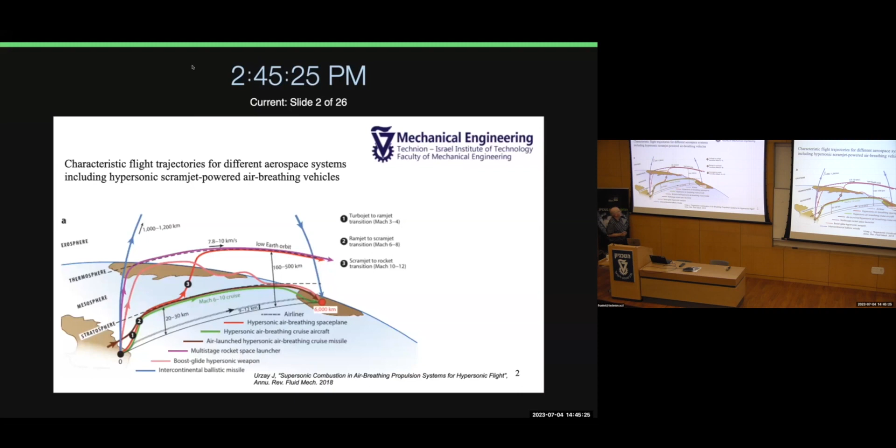Basically, if you want to transport some payload from one continent to the other, you've got several options. One of them is airliners, which fly over 9 to 12 kilometer height at about Mach number of 1. The opposite is ballistic missiles that go to space. And there is also the option to use air breathing propulsion for fast flight, at a height of 20 to 30 kilometers.

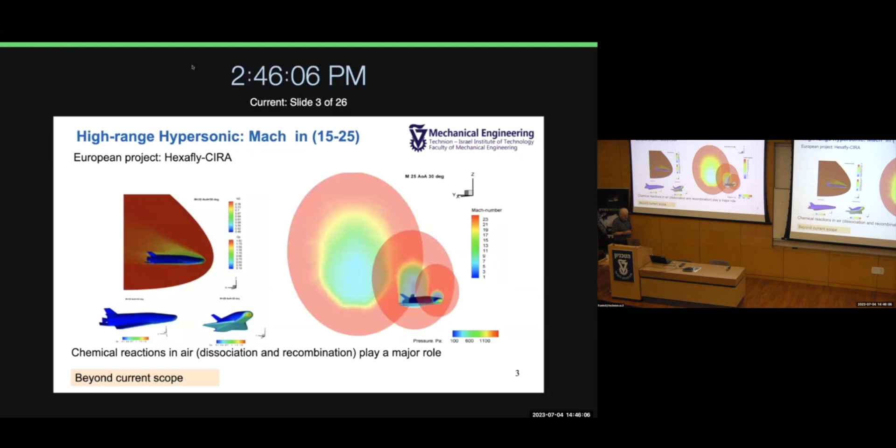Now, when you are talking about hypersonic flight, there is the extreme of very high Mach number, between 15 to 25. There is the European project Hexafly-CIRA aiming at that direction. In that case, chemical reaction in air plays major roles. I'm talking about dissociation and recombination, but this is not the current scope. I'm looking at more moderate conditions, the mid-range hypersonic flight, Mach number between 5 and 15.

There are already several demonstration flights in this field, like the very famous X-43A, which flew in 2004 for 20 seconds, and was the best source for a long time for data for evaluation of design tools. There is also the very famous case of X-51, which flew about 10 years later. It was propelled by hydrocarbon fuel, unlike the hydrogen of the first one. It flew for quite a long time and provided a lot of data.

And there are a lot of vehicles now under consideration. Some of them were mentioned in the morning, like the Lockheed Martin SR-72. This is an artist's impression, so don't base anything on that. Boeing is also presenting a mock-up of a civilian transport in all the last AIAA meetings I've attended, and probably eventually it will fly.

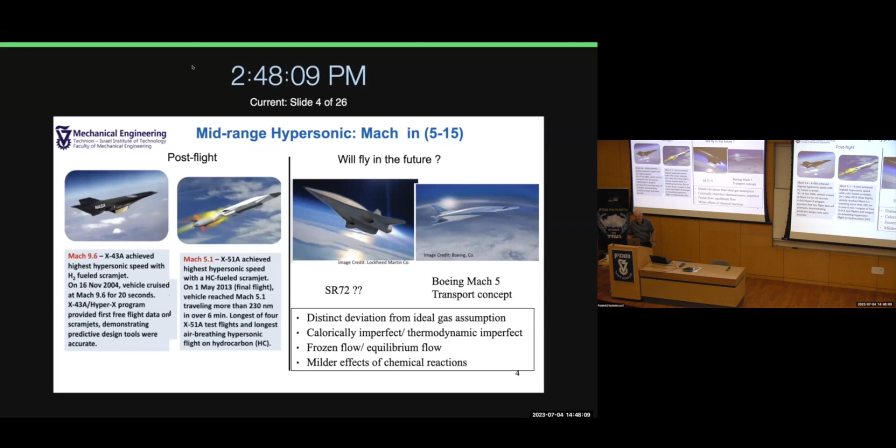When you consider selecting which propulsion system to use, you usually look at the ISP, specific impulse. You can see clearly that rockets give very low ISP but constant across all Mach numbers. For low Mach numbers, turbojets and turbofans give the best performance, using both hydrogen and hydrocarbon fuels. But as Mach number grows, their attractiveness is reduced, and ramjets and scramjets become more favorable.

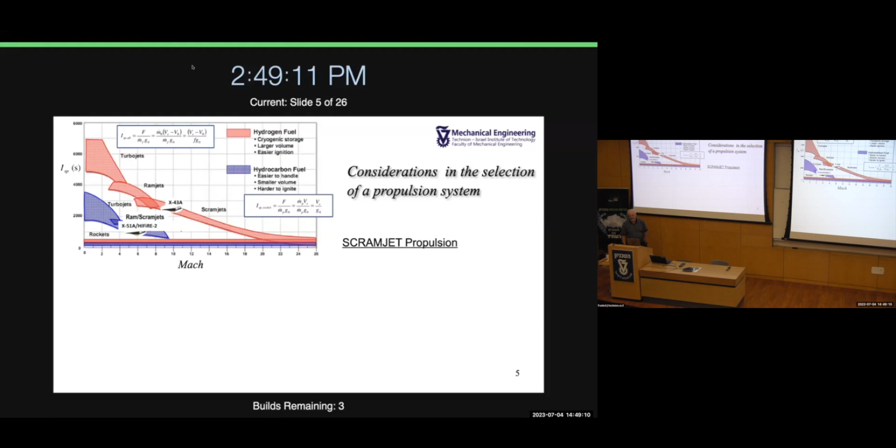In the range between 6 and 15, scramjet is the best option from the point of view of ISP. So if we look at scramjet propulsion, what is it actually? Again, in the morning you've seen this picture. It is based on the concept of compressing the flow through a set of shock waves without moving parts. Looks simple, but it's far from being simple.

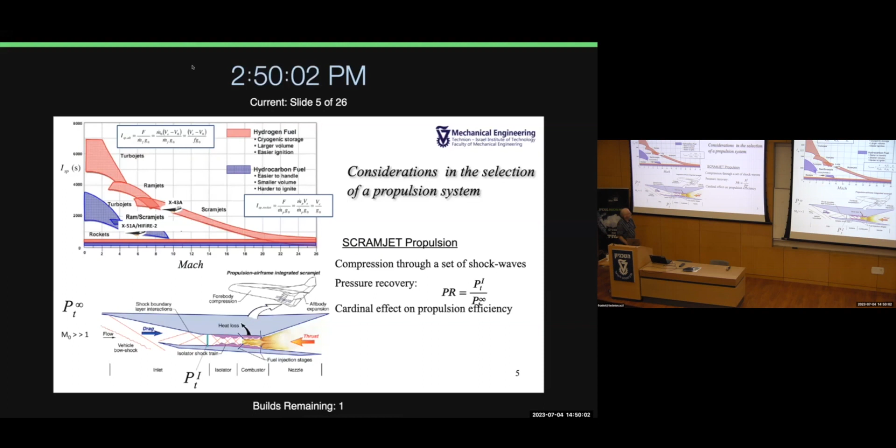However, a crucial parameter in the performance of such an engine is how effective this compressing effect is. We measure the losses during this compression by the pressure recovery, the ratio of the P total at the entrance of the combustion chamber versus the P total of the free flight. This is an important metric to evaluate propulsion efficiency. But there is a question: how do we compute the total pressure in this velocity regime?

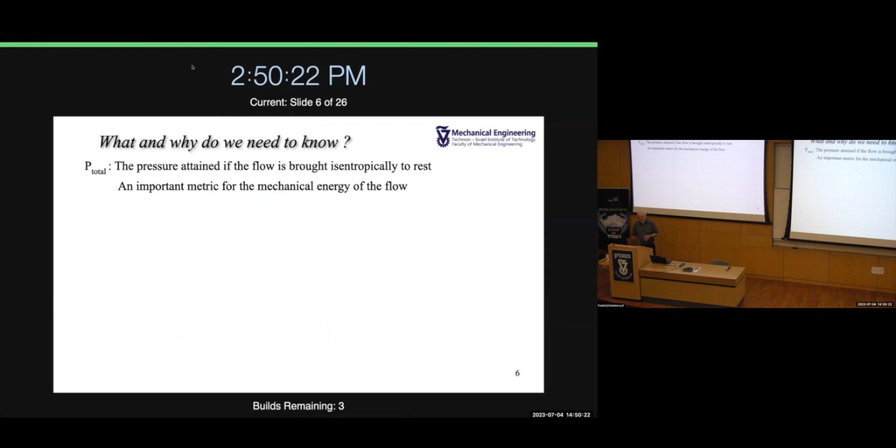Let's first find out what we actually want to know. P total is the pressure attained when the flow is brought isentropically to rest. It is an important metric of the mechanical energy of the flow. T total is the temperature measured by bringing the flow adiabatically to rest, and it is an important metric for the thermal energy of the flow.

Another thing: whatever we measure in supersonic flow, a shockwave develops in front of the probe. So accurate shockwave relations are important features to achieve our purposes. In combustion, for propulsion, P total and T total characterize the propulsion potential, certainly together with the fuel energy and the combustion efficiency.

However, again, I repeat the question: how do we evaluate the total pressure? Now this question was raised by a kind of semi-poll by someone at Rafael.

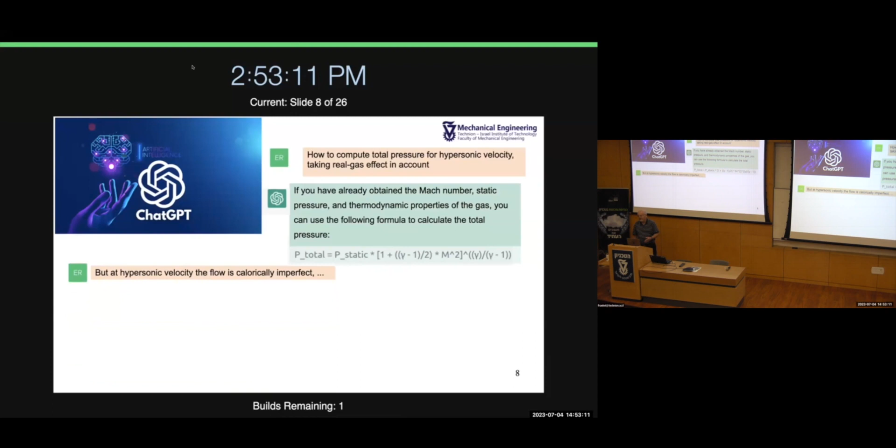So I said, but at hypersonic velocity, the flow is calorically imperfect. So ChatGPT said you are correct, and actually you might need some other kind of equation, like the van der Waals equation. So basically, ChatGPT is like an aeronautical engineer, a typical aeronautical engineer graduate, but has some potential if you probe it.

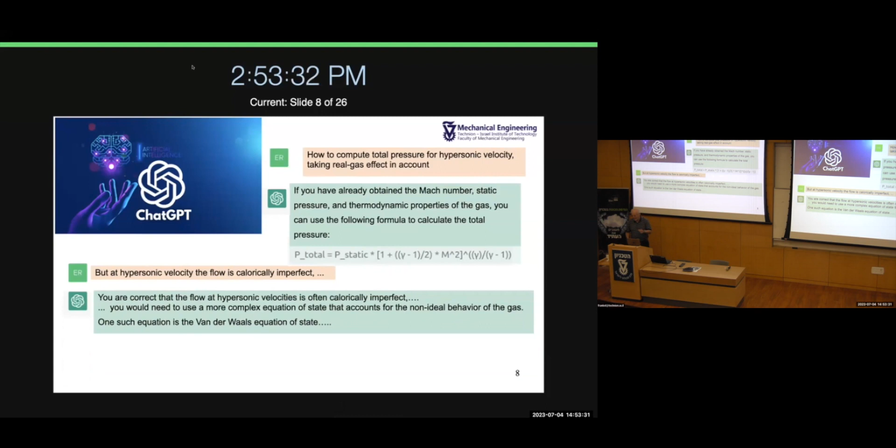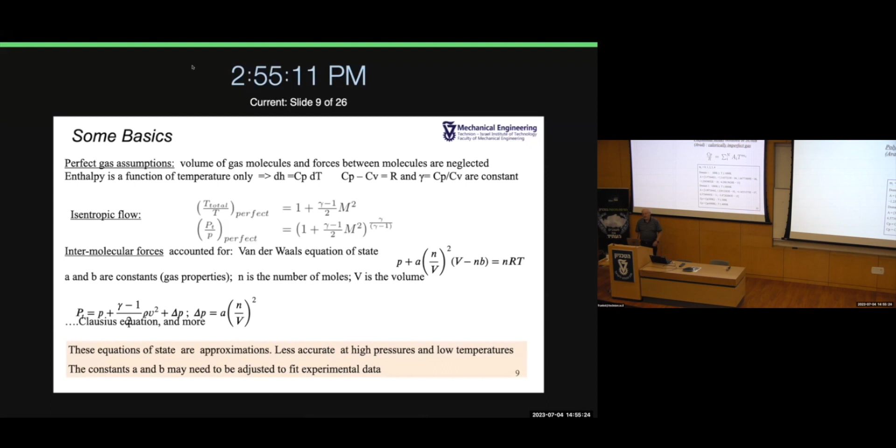Let's see what, if we are talking about approximation, what are the common approximations at our hand? A very old, common approximation is the polynomial model. I introduced it in SUMB about 25 years ago, I think. It appears in many CFD software where the specific heat is a function of a polynomial on temperature in two domains. It is based on NASA polynomials, which were published, I think, in the 50s or 60s of the previous century.

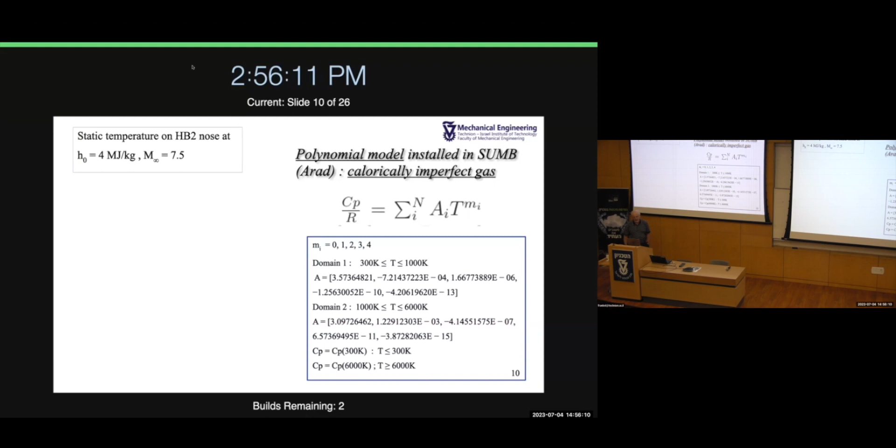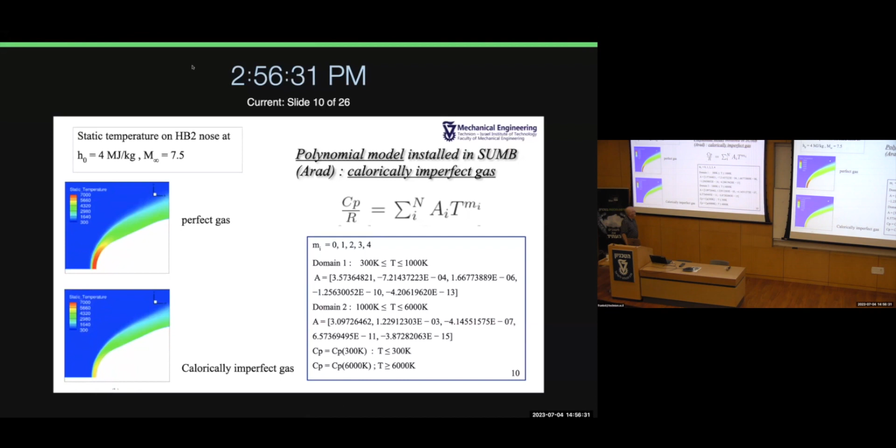We went further, and by 2017 myself and Shlomi Shitrit published work about an equivalent gas model, where we took a bit more complicated approach to calculate the specific heat based on both temperature and pressure. This formulation was suggested earlier by Gupta in 1991.

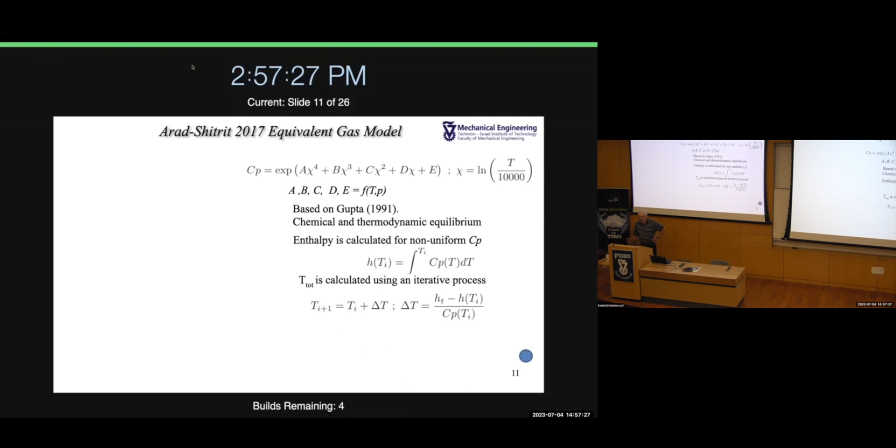The concept here was that enthalpy is calculated for non-uniform Cp, which means we compute directly the integral of the enthalpy, and then T total is calculated using an iterative process, demanding the following equation to be fulfilled, and then requiring isentropic flow. You can get a formulation for P total using the previously obtained T total.

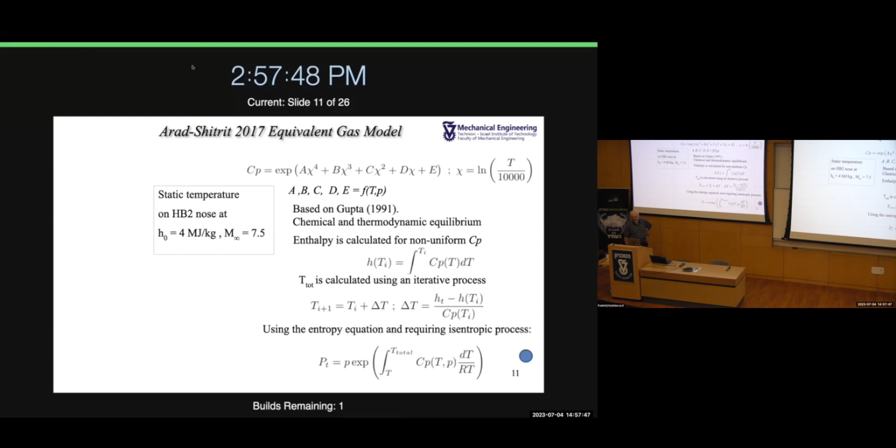And so, because we have been working since 2018 on combustion with chemical models in much more detailed chemical approximation, I thought maybe I'll check those approximations and see how good they are. So that's what we are doing right now.

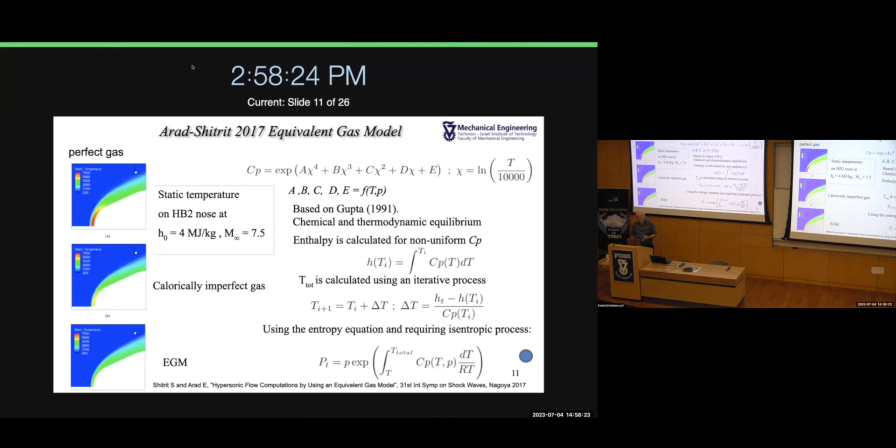Currently, we are using Cantera, which is an open source software for chemical kinetics. Cantera uses various chemical mechanisms which can be pretty detailed, like the Aramco code, or very high detail, like the UC San Diego chemical mechanism and others. Out of them, you can make chemical calculations much more accurately than the approximated method I mentioned before. So the script I'm showing here was prepared together with Ido Ruhman, who is sitting here.

We were looking at dry air, which is typical to the level of flight of a hypersonic flow. That is, the air is composed of oxygen and nitrogen, and total enthalpy is calculated by its definition. Then you define an algebraic equation for the enthalpy, and you ask it to come to zero. You solve it algebraically. And also, as before, we claim that delta S should be zero, then we can get P total, or alternatively, we can solve a different equation, H of P minus H total should be zero, to solve directly for P total using Cantera.

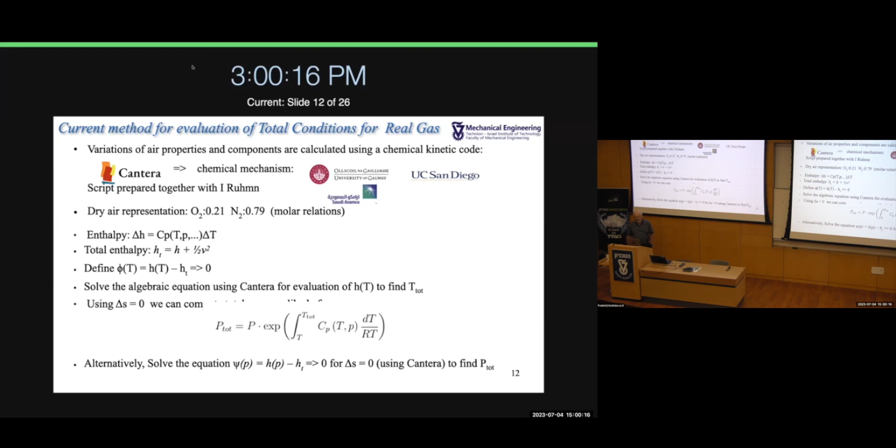So this gives us both P total more accurately, and also the coefficient. And let's see how well the approximations are working.

First, let's look at the original formulation, the polynomial model. Here I look at specific heat versus temperature for a large range of temperature. And I compare the blue line, which is the original polynomial, with the red line, which is the Cantera result, which I consider accurate. You can see that the difference between them is less than 1%, which is pretty accurate.

But if we go further and make a very small modification in one coefficient in the two region A0, I get the green line, which is nearly on the Cantera result, and the difference is now below 0.2%. So to start with, at moderate high Mach number, this polynomial approximation, as old as it is, is a pretty good approximation. But let's go further.

Let's talk about measurement in supersonic flow. I mentioned it in the beginning, so let's add this issue. When you put a probe in supersonic flow, you get a shock wave standing in front of it. Along the shock wave, there is a significant rise in pressure and losses of P total. Actually what you measure in the probe is after the losses, so beyond the shock wave.

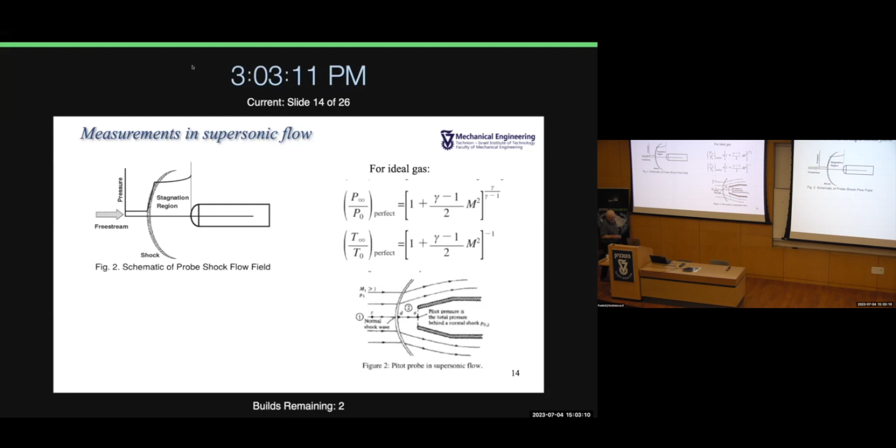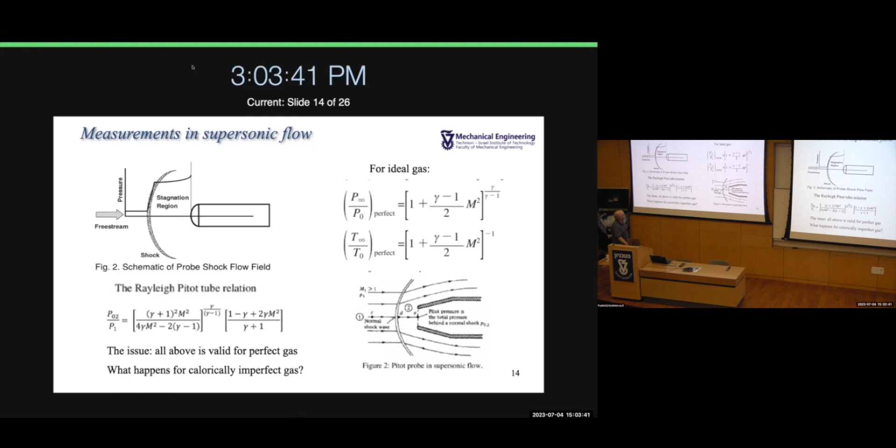Page down here. Okay, there is the very famous pitot-tube relation, which is very common, but as I said, it depends on the ideal gas assumption. Is it good? Well, the issue is: is all this valid for imperfect gas?

So let's look. I said, okay, I'm not the first person looking at this issue. What are the common correlations? What are people using to do measurements? So I made my own poll in Rafael and in the Technion.

After asking several people, I was directed to a publication by JAXA, the Japanese space agency, about doing measurements in hypersonic wind tunnels. They published an approximate relation between real and perfect gas, both for P total, for T total, and for the shockwave across the probe for the Rayleigh Pitot correction.

Everything that I wanted was just written here. So I said, great, I found the result. But let's read the paper and see on what measurements or whatever they depend. So I read their data.

I found they actually got a reference for an earlier paper from a wind tunnel in AEDC, from 1981. In this paper from AEDC, they got not only this formulation exactly, it was totally copied and pasted from one paper to the other.

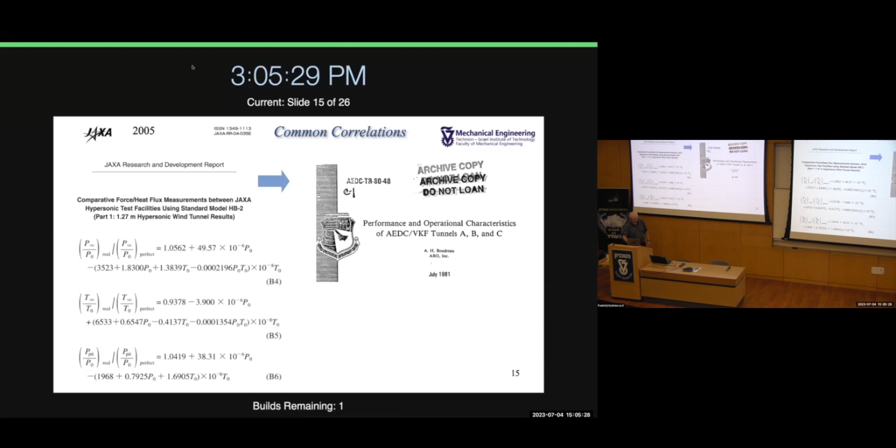But what is the source of the data in this AEDC work? I mean, AEDC is a serious place with a serious wind tunnel. So I looked again at what the source of their correlations was. And well, okay, now you can see it: these are NACA reports from the middle of the 20th century.

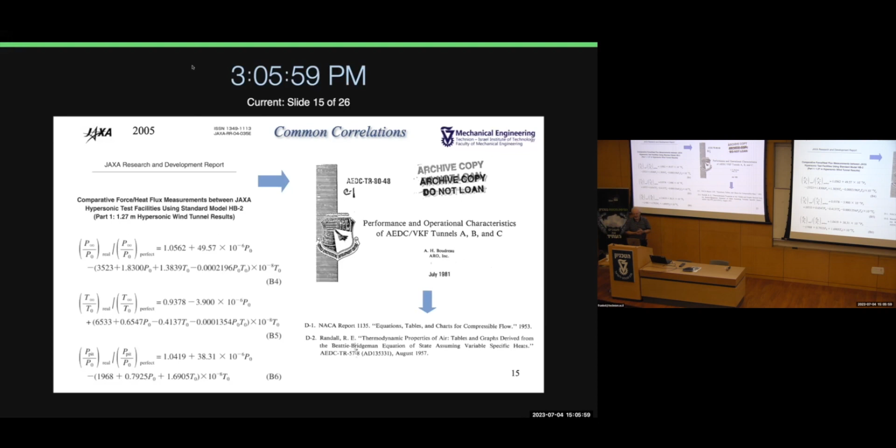They are the source. At least they have done their own work, and they have solved some approximate equations, which currently are not so much in use these days. So I didn't try to solve this equation again, but I said, okay, I got Cantera, I got a chemical mechanism, let's check what is correct and what is not correct.

So the first thing is P total, computed versus Mach number. You can see here ideal gas in blue, the result of Cantera, which I consider accurate, and the JAXA approximation. You can see that as long as you are below Mach 5, all relations are pretty accurate or match each other closely.

In the region between Mach 5 to 7.5, ideal gas gives an under-approximation of P total, which can be pretty large. The JAXA correlations are pretty good, but once we go beyond Mach 7.5, they start to deviate from the Cantera result and give some error. So in a way, this gives you where and how to compute P total.

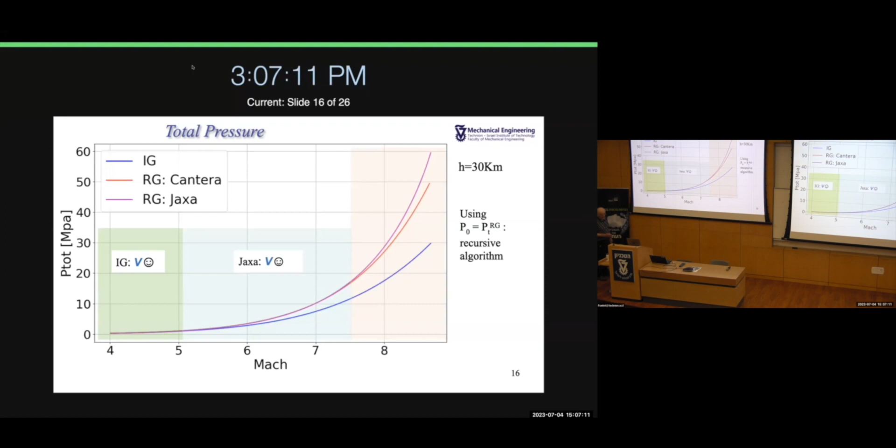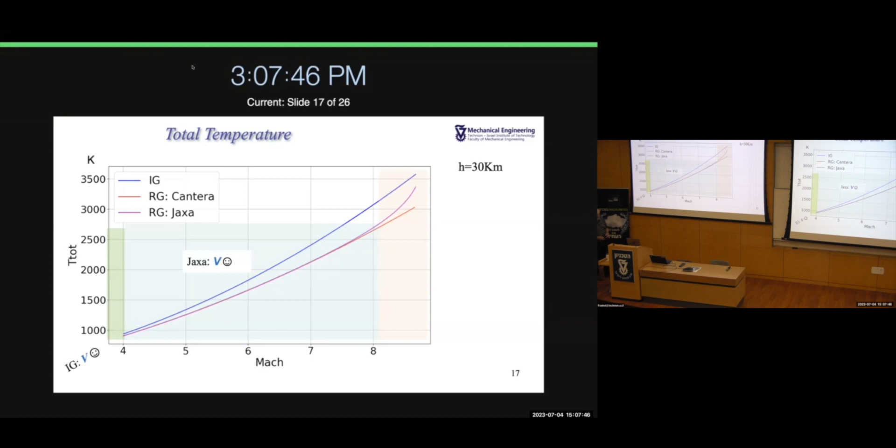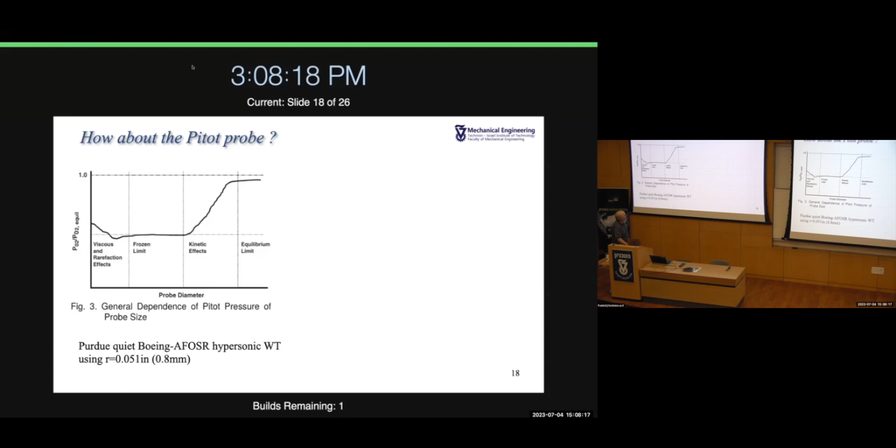Then I said, what about the pitot tube? When you take a pitot tube, you want to make it as small as possible in order to be in the frozen limit. If it's too small, you get viscous effects. If it's too large, you get kinetic effects until you reach chemical reaction. The typical probe used at Purdue is 0.8 millimeter, and people were calculating flow over such a probe. So I said, why won't I try my hand on that one.

Just another comment, there is an ARC wind tunnel here in the Technion. I asked them what they are doing, and they said they are limited to Mach 4, so they're using ideal gas with modified gamma, and this is sufficiently accurate.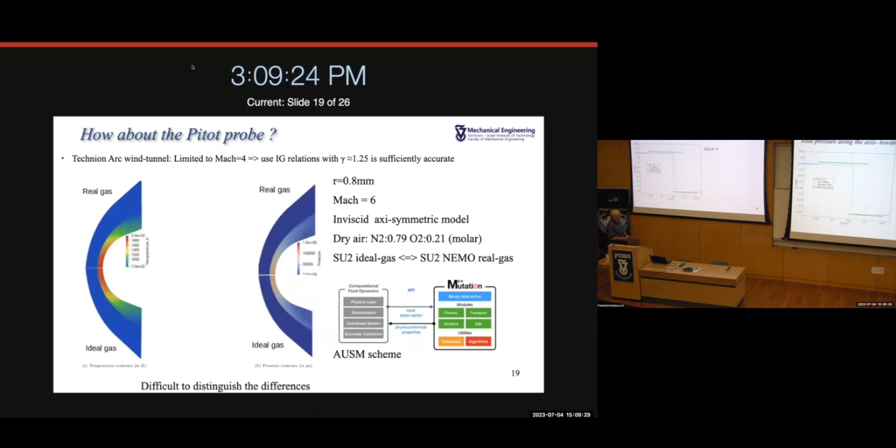So let's look at the distribution along the axis. The first case, Mach 4, a low Mach number, you can see several things. First, there is a small difference between ideal gas and real gas. Ideal gas, which is here in blue, matches the Rayleigh-Pitot green relation, which is not surprising. And the real gas matches the JAXA relation for the shockwave. Pretty good. Behind the shockwave, the shockwave standoff is the same for ideal gas and real gas at first, and there are some minor differences.

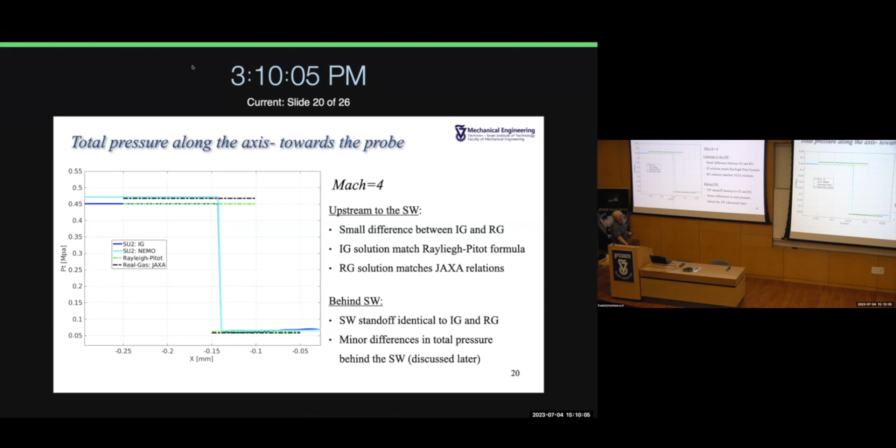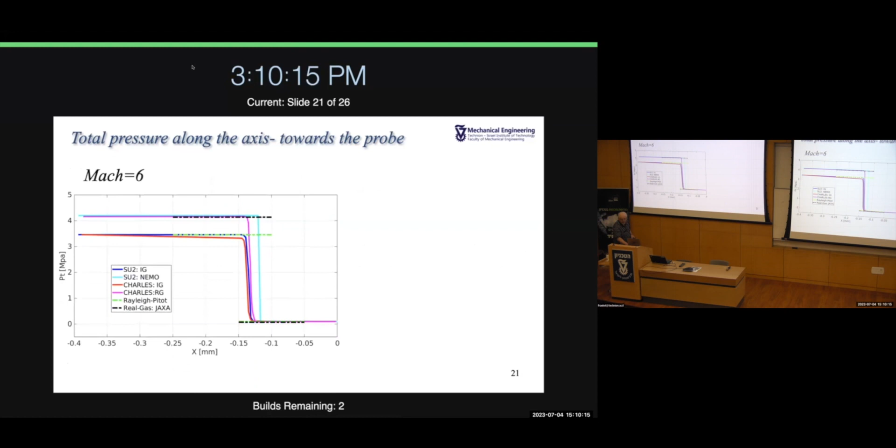I will discuss them later. Now let's increase Mach number to 6. Well, a few more slides.

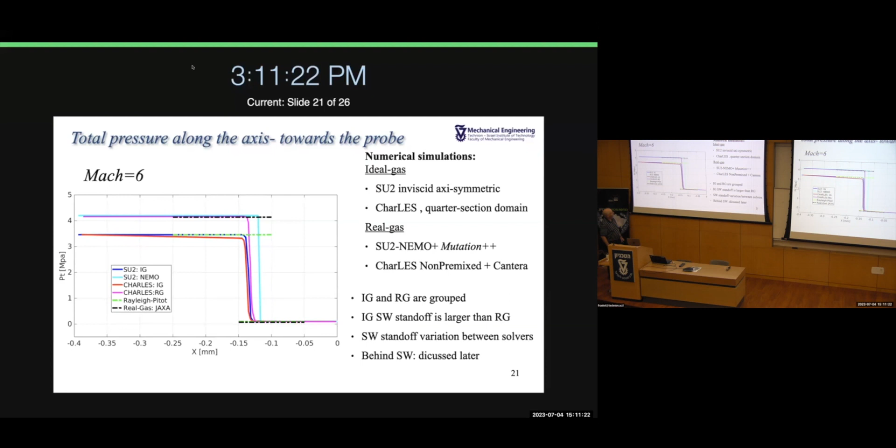Here I've added another simulation by CharLES, which is LES. Not so much because I wanted the LES capabilities, which are irrelevant, but because this is a different chemical model with Cantera. So what you can see in this comparison -- there is a problem of reaction time here. What you can see is that again, ideal gas and real gas, the two concepts, are grouped together. The standoff of the shockwave between ideal gas and real gas is different, and there is also a difference between the software, but generally one can see what one expects.

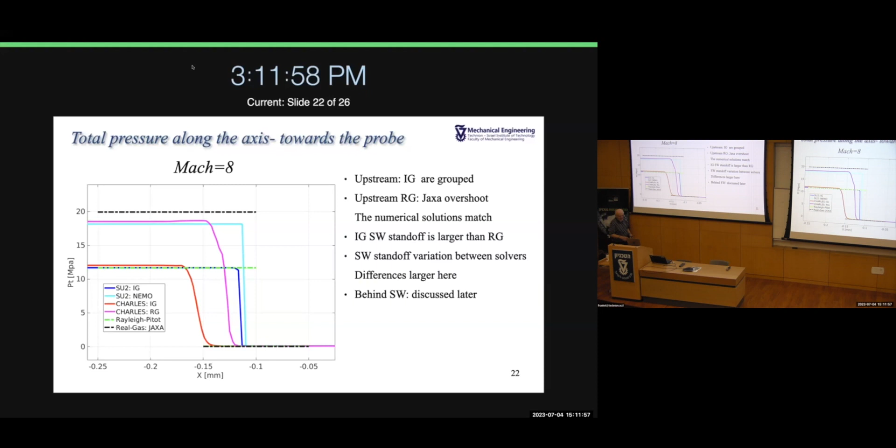I'll talk about beyond the shockwave later. But now let's go to higher Mach number, Mach number 8. Here you can see that JAXA is now giving an overshoot of P total as expected from before. The grouping of ideal gas and real gas is typical. The difference between the Mach number shockwave standoff is higher here. Now let's look at what happens beyond the shockwave.

And here we see an interesting difference. Just need to wrap it up a little bit because we have to zoom. Yeah, that's the end, one before the end. What you can see, first, if I take ideal gas, or the Rayleigh-Pitot relation with gamma 1.4, I get the blue line, which is totally identical. If I take the Rayleigh-Pitot relation with smaller gamma, then I get the green line, which is pretty good agreement with the Cantera result.

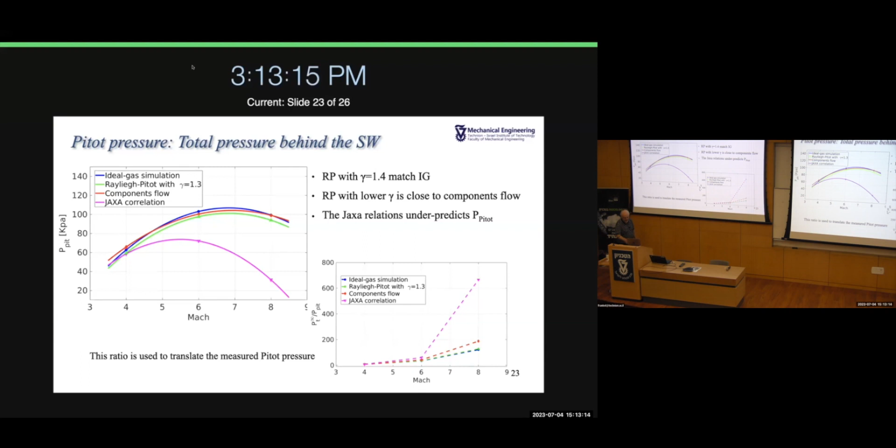However, the JAXA relation gives a total under-prediction of the pitot pressure, and because the measurement of pitot pressure is used for P total, this under-prediction gives a very strong error when we try to approximate P total at the far field by these measurements. So there is a big question about the JAXA relations in the context of measurements.

So my concluding remarks are that in the hypersonic regime, the credibility of ideal gas approximation is losing ground. Total condition and temperature are significantly affected by real gas effect, and they are very important for propulsion potential. Measurements through shock waves deviate from ideal gas, but the common Rayleigh-Pitot relation provides a better approximation than more exact correlations. The next step should be measurement in supersonic probe flow in high velocity and high enthalpy flow. It is a pretty simple measurement, but accessibility to a suitable wind tunnel is not that simple.